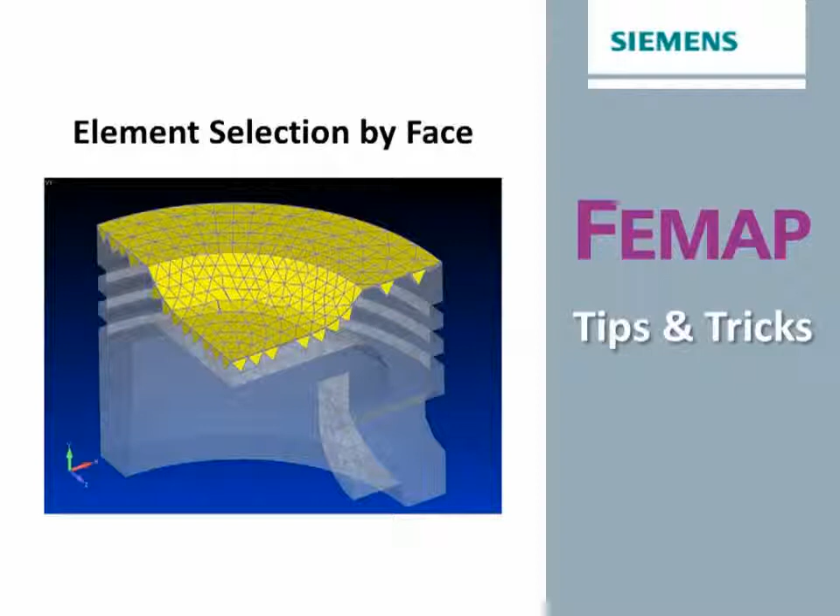Sometimes, in the absence of any underlying geometry, finite element selection, for whatever reason, can become challenging. Femap includes many capabilities that can aid element selection, and in this example we'll see how to select a group of elements that have adjacent faces.

Consider this simple finite element model of a piston, and suppose that there is no underlying geometry available. We wish to create a group containing all of the elements of the top face, and will use Femap's adjacent face picking capability to select all of the relevant elements.

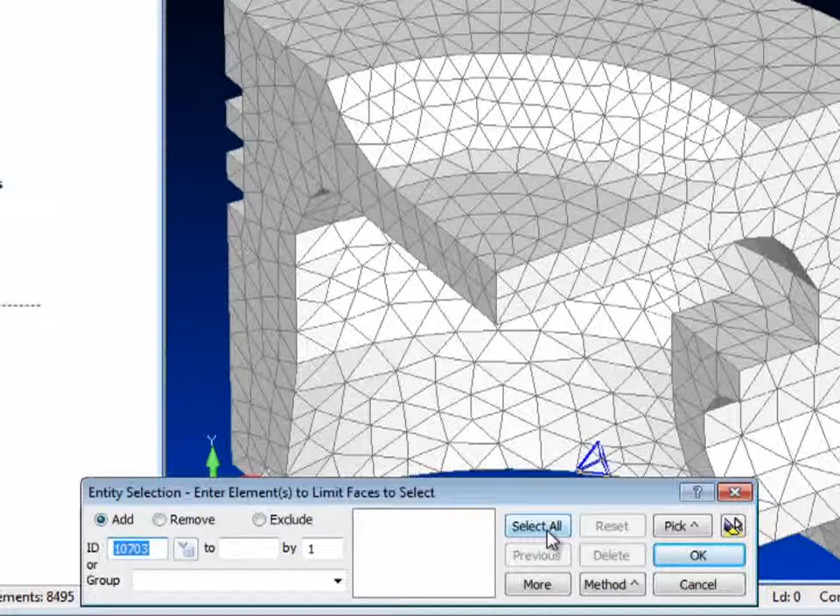In the Element Entity Selection dialog, click on the Pick button and select By Faces, and a second Entity Selection dialog appears. Here you need to select the general group of elements that includes the subset of elements you eventually want to end up with. In this case, we can select all and click OK.

Then, in the subsequent Face Selection dialog, click Adjacent Faces and pick one of the desired element faces and click OK. Now we're back in the first Entity Selection dialog, and here we can highlight what we've selected. You can see that not all of the top surface elements have been captured.

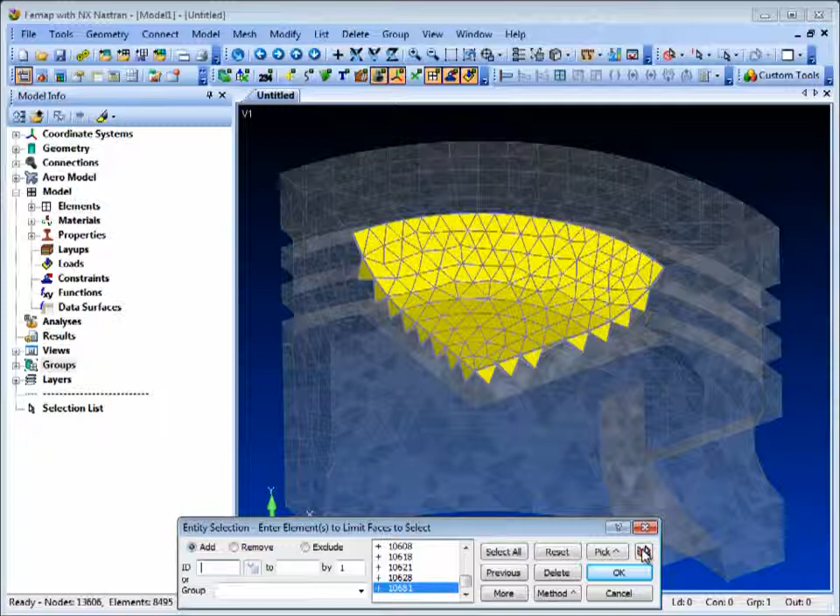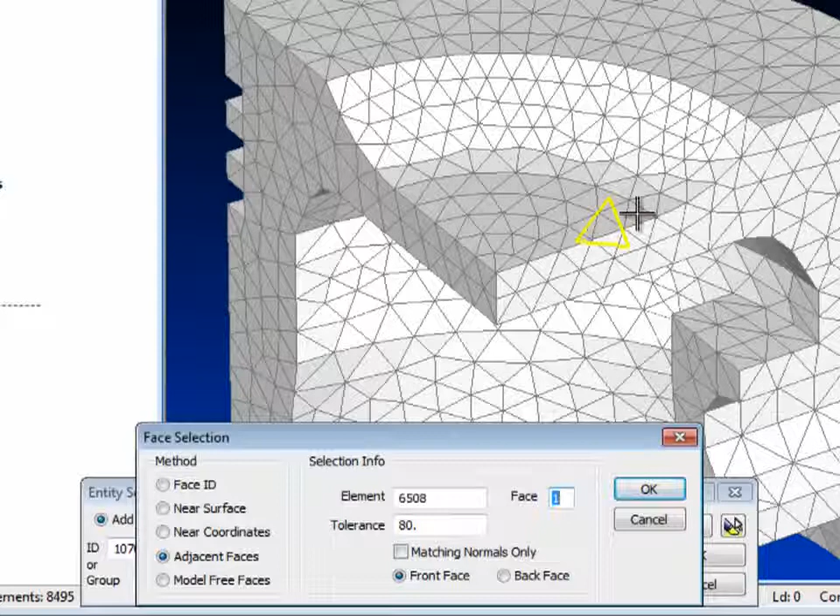So let's go through the process again and get back to the Face Selection dialog, where you can see there is an angle tolerance that controls what Femap considers to be the adjacent element plane from element to element. The default is 20 degrees, so if you want Femap to include elements around less acute angles in the model, then we need to increase this tolerance. Now we have all the elements that make up the top face of the piston model, which we can put into a group.